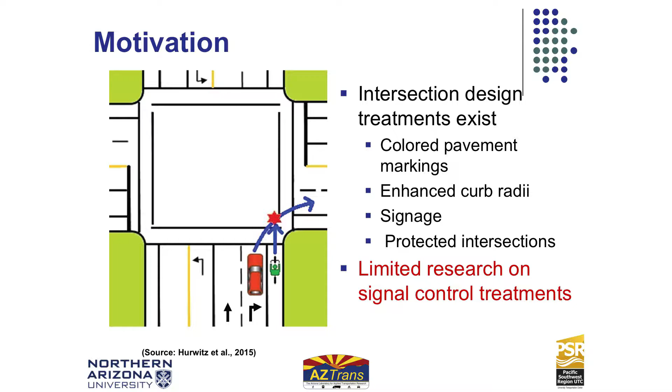I was born and raised at Purdue in research, and we did research on vehicle performance measures. And in the last 5 or 6 years, I've gotten more involved in multimodal performance. So I think I have a little different perspective on this than someone who might be purely involved in the multimodal side of this.

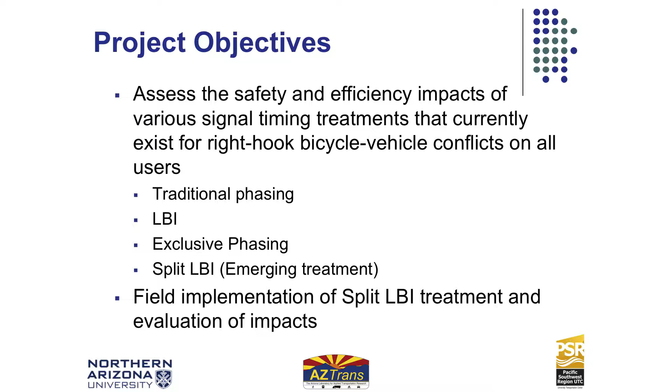I'm going to go back up one slide. So when we did this project, this started in about 2015. There had been some recent work looking at paint markings, other things that can reduce conflicts at signalized intersections. We wanted to look at the signal side of it: traditional phasing, a leading bike interval, exclusive phasing, and a split leading bike interval. I'll explain what these LBI mean shortly if you're not familiar with that. And then we also want to do a field implementation.

So the motivation is to avoid this conflict, this right hook conflict, where we have the vehicle turning right and the bicycle proceeding through. This can happen when a vehicle overtakes a cyclist as this is occurring, or it can also happen where the cyclist overtakes the vehicle if the vehicle is queuing to wait for people to cross, or other friction. So there's been limited research on the signal control options to address this.

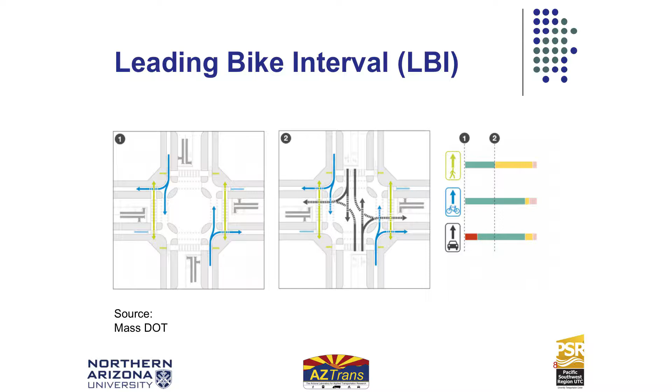If we look at that from a bicycle standpoint, these figures are from a Massachusetts DOT guide. We're looking at the phase indication for pedestrians, bicycles, and motor vehicles. On the left here, what we're doing is holding the vehicles and giving the bicycles preference, giving them time to start their cross at the intersection. Think about what we're trying to avoid: the vehicle turning across the bicycle. If we can get those bicycles queued up at the start of green through, we've avoided the possibility of those conflicts.

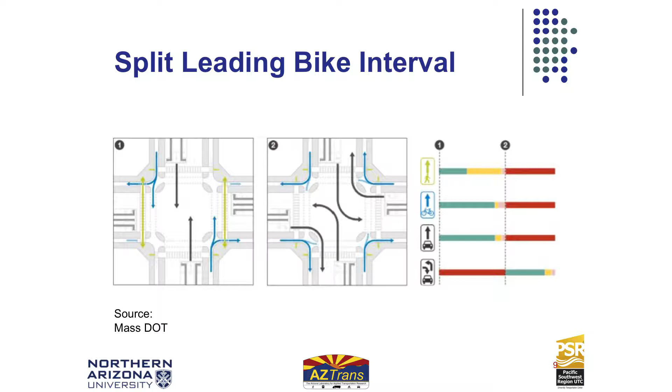A split leading bike interval is very similar to an LBI, except in this case we are only holding the right-turning traffic, allowing the through vehicles to go along with the bicycles and pedestrians. The idea is that with a full LBI I increase the delay for all vehicles, but with this I only increase the delay for the right-turning vehicles. The through vehicles don't see much of a change in how long they have to wait.

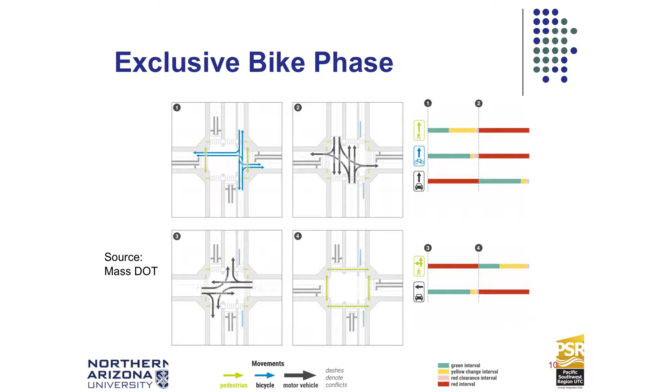The last treatment that was part of this isn't really a signal strategy, but came about because we had access to the video and the funds to analyze it: that of a mixing zone. The idea with a mixing zone is that we move this conflict point back from the stop line of the intersection, or out of the intersection, and allow the different users a chance to sort themselves out before they get to the intersection.

Survey was the first part of this. We had a total of 69 respondents. Again, this was a practitioner survey. We had 65% identify themselves as engineers, 18% as planners, researchers, and a few others. We asked about their awareness of split LBI. Now, this survey was done in about 2016, so I think this has likely shifted, I hope, by now.

About half knew of it. As far as those that actually implemented the different strategies, we had about 25 or 30 that did protected bike phases, LPIs (leading pedestrian interval), and leading bike interval, we only had 10 that did that. These don't need to add up to the total number, they can do multiple ones. Split LBI, just a couple of them, and about a third of the respondents didn't do any of that.

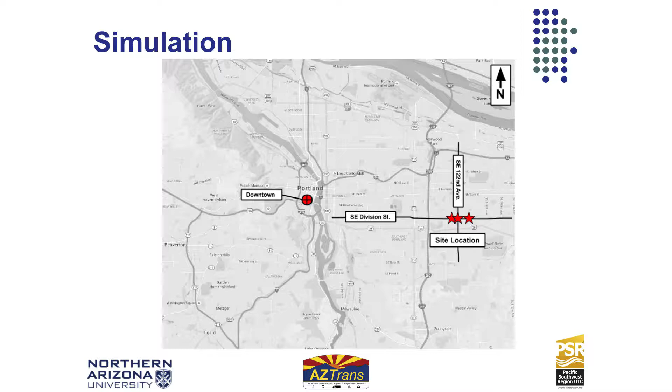The next step was to do a simulation. The idea was to see what the impact was on the delay of all users for the various strategies. Just prior to this project, we did a very similar project on pedestrian strategies at signalized intersections, and it was actually very useful. This didn't work out very well for the simulation for a couple of reasons. One being that the way bicycles queue up at an intersection, when we did this we used VISSIM, didn't really match reality. I mean, if you have 8 bicycles going up to a bike box, they're not going to stack 8 behind each other.

They're going to kind of queue up into a group and go forward like that. At the time we did this, and I'm unable to say if VISSIM has changed that because I haven't done work in that space since, that was one of our issues.

So we did a software-in-the-loop simulation with an ASC/3 traffic controller. Who knows what this term is? All right, we got two. This one? All right, excellent.

So ASC/3 is a traffic controller. It's used to determine how long each direction is going to get green, yellow, and red for all the users at a signalized intersection. Software in the loop simply means that I have my simulation software, which is VISSIM. I actually have a plugin inside that runs the software of that ASC/3 controller. So as opposed to using an embedded traffic controller inside the simulation, which likely will not have the same features as a field traffic controller, I can do everything in that software, in that simulation, on that ASC/3 that I can do out in the field. There are a couple of different controllers that have that available.

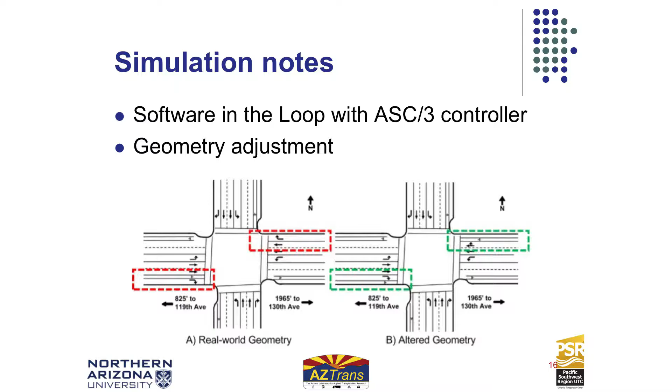So on the left side, this is our real-world geometry. We see that the bike lane is between the right turn lane and the through lane. That's where we want that. We don't want the right turning vehicles to have to cross the bicycles. And in the westbound direction, we don't have a bike lane here.

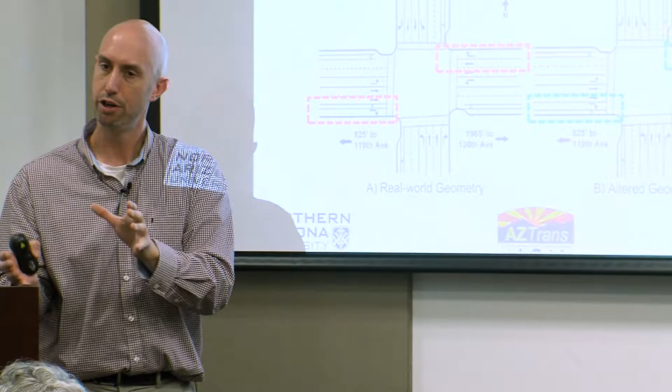So what we did in the simulation, we changed the bike lane to put it outside of the right turn lane, which is something we wouldn't do, but we wanted to have that conflict occur in simulation. And again, when you think about the simulation results, we're not trying to validate this to the real world. We're just looking for differences between strategies within the same simulation space.

And then westbound, we changed this into a combined through-right with the bike lane to the right of it to see that conflict.

We collected field data. There's a firm called Quality Counts that we paid to do this. Our pedestrian volumes were not coded for directions, just a kind of a note. Our bike volumes were extremely low.

Portland is somewhat of a cyclist mecca when you're closer to downtown. This is far enough east that there weren't the number of bicycles in the real world data to give you any reasonable interaction between the different modes. So what we did was we ran the bikes in 10 different sets of the simulation as a percentage of the mode share.

So what we would do is for each one of these different data sets, we would have more and more bicycles to help us get a little larger set of interactions. Again, this is a comparative simulation. We're not looking to validate this to any real world deployment.

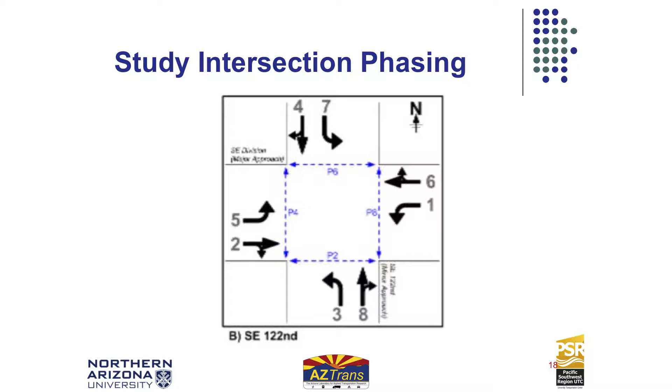So this is a diagram of the intersection phasing at the intersection. The only thing you need to think about, if you don't understand what this ring numbering is, is that phase 6 is the westbound movement and phase 2 is the eastbound movement. This diagram will be up in the upper right-hand corner as I talk about some of the results, so you can kind of think about the direction we're looking at.

All right, so first we look at the leading bike interval. This leading bike interval is compared against a base case. The base case is just a coordinated timing plan with vehicles being coordinated in the east and westbound direction along Division Avenue.

So we look at the through movement, LBI delay, for the vehicles, and we see that we do increase delay about 5 seconds or so, which makes sense because our LBI was a 5-second delay. For the right turn delay, we see an increase in delay, actually, excuse me, not much of this. Apologies, I think I have a timing on this I didn't think I had. Going back, we saw an increase in the right turn for the vehicle delay as well.

The split LBI, again, now we're looking at phase 2. We're looking at this direction here.

Vehicle delay. This is the case where we're just holding the right turning vehicles. The through vehicles are allowed to go.

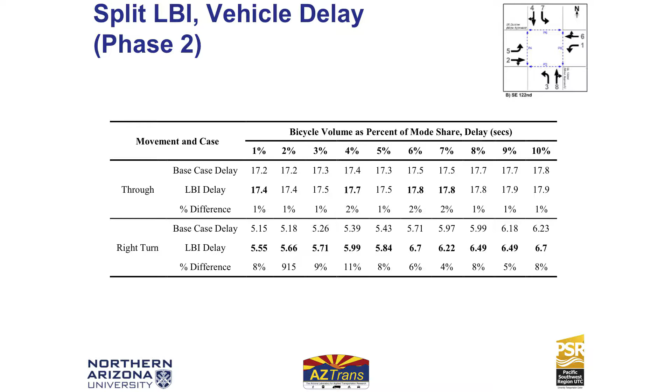With the bicycles, we see that the through vehicle delay doesn't really change, but we have an increase in right turn delay. Again, it's what we would expect to see. The bike volumes don't change very much.

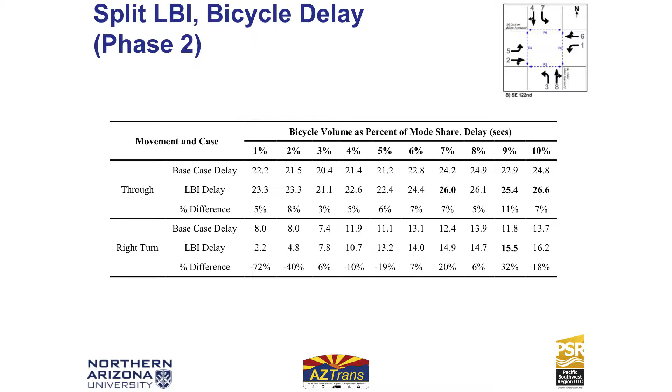As far as bicycle delay, we see a decrease in the bicycle delay at lower percentages, but at higher percentages, this is a coordinated arterial, so that means we're setting green times artificially to move vehicles up and down that corridor. When we have very low numbers of bicycles, when they arrive at the intersection really changes the amount of delay they have. When you only have a handful of bikes, you get numbers that look like this. So these are things you should think about when you run a simulation, to think about what the results actually mean, because this doesn't mean a whole lot, as I presented to a camera.

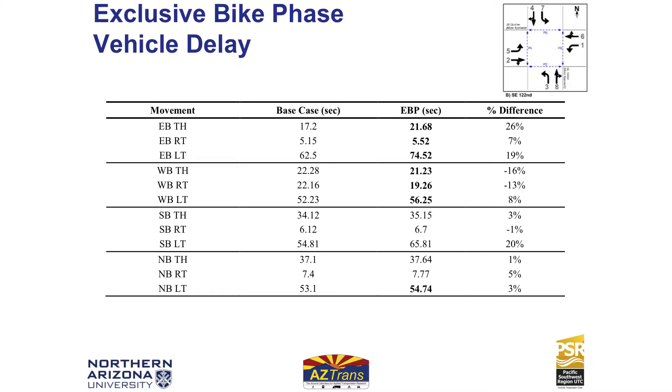Looking at the exclusive bike phase for vehicle delay, this is when we hold all the movements at the intersection and let the bicycles go. This is vehicle delay, we see base case versus exclusive bike phase. We see an increase in delay in most of the cases. There are a couple that are lower, but again, we're looking at when those bicycles arrive during that cycle. Then we see something similar for the bicycle delay.

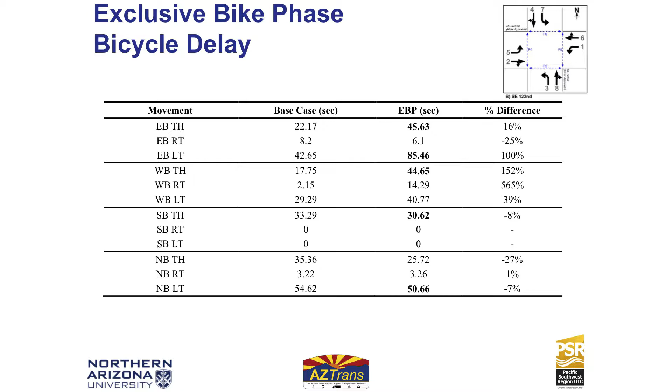All right, I'm going to get to what I think is the real meat of this presentation.

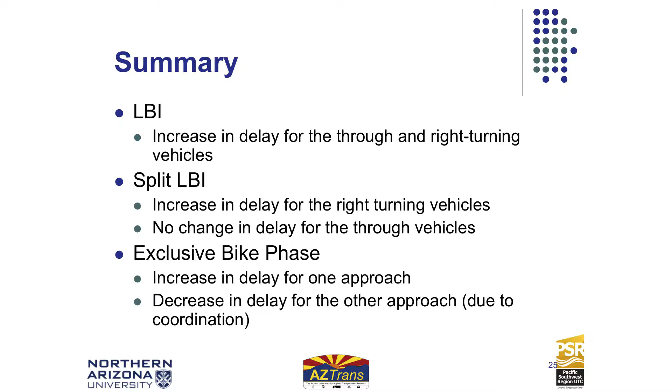All right, the field evaluation. Our initial intent was to do a nice, clean before and after study. We have a specific intersection approach, collect data about the amount of conflicts between vehicles and bicycles, make one or two changes to it, then collect data again, and try to develop some numerical guidance from that.

It didn't happen. We tried the city of Phoenix, which I'll show you in a bit. We did do that, but over two weeks, we didn't have any bicycle motor vehicle conflicts. The other locations, city of Portland and New York City, while they made changes, there were a lot of changes at the same time. Anyone who's tried to run a statistical comparison knows that when you only have two sites and you change seven things, there's no way you can pull out any one of those individual metrics or changes and point to it with any degree of certainty.

So we analyzed a number of different sites and provide some qualitative comments on this, with the idea of moving forward, trying to provide some numerical guidance for when to use a certain countermeasure to reduce bicycle motor vehicle conflicts.

So the metrics we looked at: whether or not there was an incident, which we classified as the bicycle and the motor vehicle crossing paths temporally within 5 seconds of each other, and I have a figure I'll show shortly. Post-encroachment time, I'll explain that shortly as well. Time since bicycle green, how long from when the bike green came on did the interaction happen, the speed, and whether or not there was an evasive action.

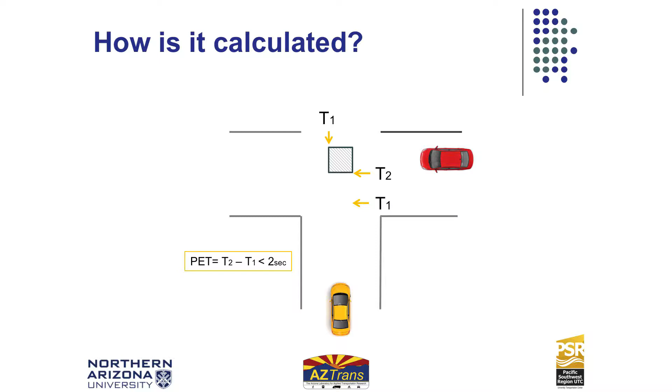Post-encroachment time is the time from when this vehicle leaves the space to this vehicle arriving at the space. So you can imagine if this is a very small value, that's a very serious encounter. You were very close to actually the two users making contact. If it's a larger value, not quite as dangerous.

One of the previous literatures we looked at classified the duration of the PET value from no interaction to very dangerous interaction. One thing to think about is, do you think this is the same for Flagstaff, Arizona versus Metro LA versus Portland versus New York City? It's definitely not. So that's something else to think about as you look at the results of this work.

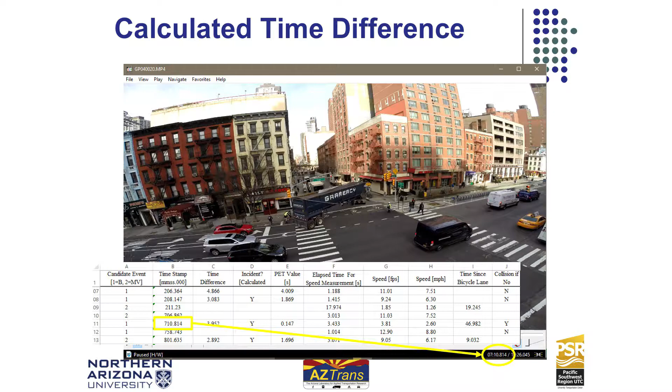So this is really turning left, and you'll see there's a cyclist behind here as we forward through the video. Here's the cyclist right here, here's the truck. So what we're doing is looking at the timestamp on the video from when each of those leaves this spot right here. Going back one frame, the truck left at 7:06, the cyclist left at 7:10. That gives us a time difference of 4 seconds.

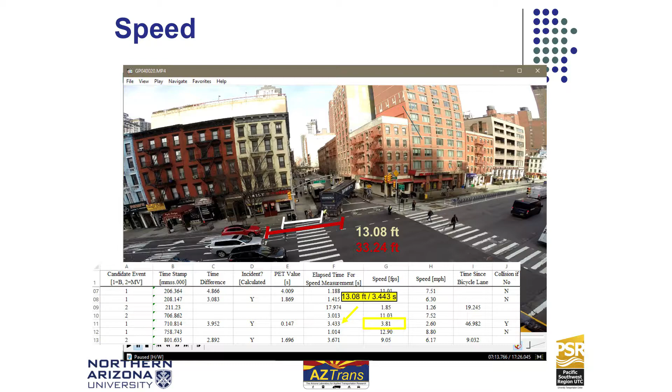And then when we actually look at the PET value between these two, it's 0.15 seconds. That's a very close, very dangerous interaction. We also looked at the speed of both the bicycles and the vehicle. The intent was to look at severity of that, but we didn't use this much in the analysis—we didn't get to that point.

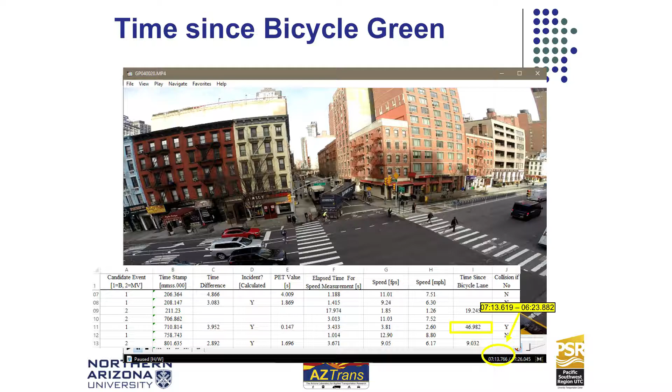So we used different landmarks on the screen to do that. We also looked at when this interaction happened measured to when the bicycle green started. Because if you think about releasing vehicles and bicycles with those conflicts, you can try to bunch your bicycles up at a certain point in the cycle to avoid those conflicts. It's similar to when you have a large volume of pedestrians—cars see them better than just one pedestrian, or cars see a group of bikes better than just one bicycle. So there's less chance of a conflict happening.

Moving on to our data overview: we ended up analyzing 7 different sets of data. We had 2 places where we had data before and after. One was 12th and Campbell in Phoenix, where we went from concurrent—serving the bicycles with the green ball—to a leading bike interval. And in New York City, we went from concurrent with LPI, which I'll show you shortly with the site, to a split LBI.

So on the surface, this seems like a really good idea—we can do a comparison—but they also changed where the bike lane was, changed coordination of the bikes up and down the street. There were just a number of things that happened.

So looking at a summary of the data analysis, the guidance I can provide from this work is really qualitative, because there are so many differences between the sites that trying to develop any kind of numerical guidance is not very fruitful.

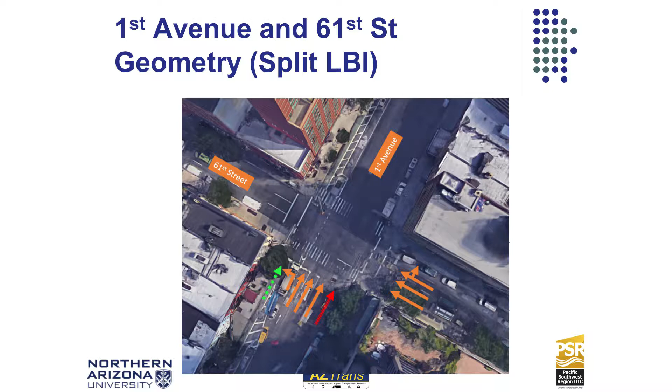So the split LBI, right? We're looking at 1st Avenue and 61st Street in New York City. Here's my bicycle lane, here's my left turn lane for vehicles.

If I actually look at the incidents for this, we didn't have good videos of this site. If we break down the percentage of incidents, we had a total of 445 incidents. About 40% of bicycles were involved in an incident with a motor vehicle. About 60% of those would be considered very dangerous.

Right, so we also looked at when the incident happened in relation to when the bicycle green started. This had a leading interval of 8 seconds, so the bikes had 8 seconds to go before the vehicles. So we really shouldn't see much going on here.

But then we also see a pretty healthy peak about 10 seconds after the vehicles are allowed to go. So this tells me that I could look at the coordination of cyclists down that corridor and possibly do something to move this up so that they're reaching the intersection during that protected part of it.

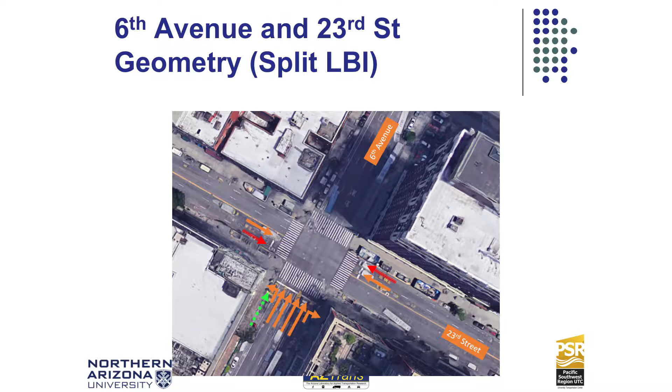Next intersection, this is the split LBI. So here we're going to hold the right turning traffic while we allow the through vehicles to go and the cyclists to go. This was the after case for our one place where we had before and after. Here is a picture of it, and we'll show ideally how things should operate.

Okay, we have our cyclist and our taxi cab. Seemed to work fairly well. The cyclist was really trucking, but the car paid attention, so it worked out well.

Here's a situation where we have a box truck, and we have cyclists moving around the box truck. One thing that we know is part of the equation is what's going on in this crosswalk right here.

What's that pedestrian volume? And we did not account for that in this work. We have another project that we think will be funded shortly, fingers crossed, that will look at doing that. But we know that's part of the equation.

So this is a summary of interactions at that intersection with the split LBI. We had only about 17% of bicycles involved in an incident versus 38% at the other locations. This one feels a bit safer. I hesitate to ever say it is a bit safer because you never really know, but based upon this study, that feels like this is a little better place to cycle through.

We got a little bit of peaking here with the conflicts, but that's pretty late into the green. But again, you do see possibly an opportunity to shift those cyclists earlier to avoid that conflict.

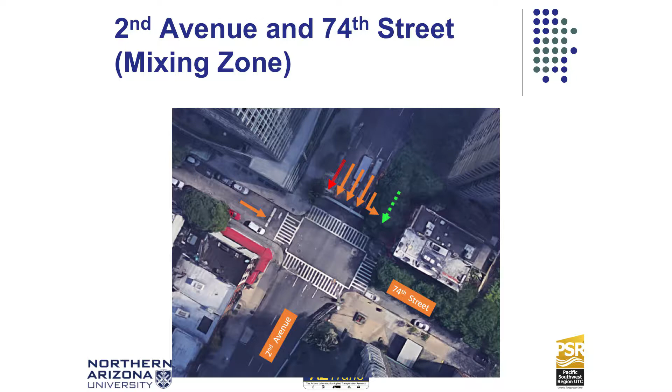Mixing zone. One location in New York where we had a mixing zone, we're looking at this direction, and this video was the original video I showed to highlight what that conflict looked like.

Again, here's that same location, we're just looking at the start of the cycle here. So here are the bicyclists coming through. The vehicles should be paying attention to what's going on to avoid that conflict. The point, or the desire of this treatment, is that you're moving this conflict point a little bit upstream so these users can figure out who should have the right of way before the actual point where the vehicle is trying to make the turn.

Here's an example of a near miss. This was actually the original video that we showed with a little bit of interaction.

About 18% at this location. We've had a couple of sites that all hovered around 20% or so. Severity, about 40% or so, very dangerous versus dangerous. And again, this is New York City - there's a lot of people there, right? So they may not consider this to be as bad a situation as we might, based upon whatever our requirements for personal space might be.

No leading interval here. This is our plot of when these happened versus the start of a green, so we're kind of all over the place in this location. Notes from this mixing zone: there was a lot of merging into the mixing zone at the last second. We had an issue with the pedestrian standing in the bicycle lane. This bike lane was against the curb, so that was an issue as far as causing some friction for the cyclists.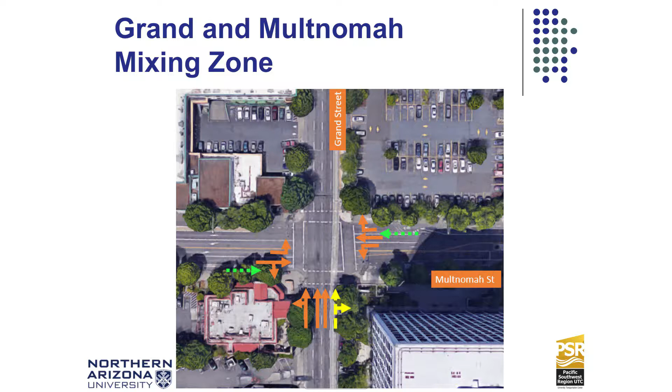This site, another mixing zone site, this is in Portland, Oregon. So different location, different population.

The video is a little bit dark, but here's a bus, and there's a cyclist coming through - we'll see if we can see it. Apologies, this came up much brighter on my screen, but you see the bus is waiting for the cyclist, and the cyclist will pull through. Then there's another example of the same site, where the cyclist just weaves his or her way into that stream of traffic.

Has anyone ever ridden a bike around Portland, Oregon? It's really an interesting place because there's such different cultures. When you're in the downtown area, the bus is always going to wait - the people are going to wait. But when you're out east towards Gresham in the suburbs, it's like driving around rural Arizona or rural California, where the bicycle goes - yeah, it's okay you're there, but I don't really want you there. Whereas downtown, it's very polite, everyone waits for the cyclist. It's really a different experience.

So this site, we had about 20% of the cyclists were involved in an interaction with the motor vehicle.

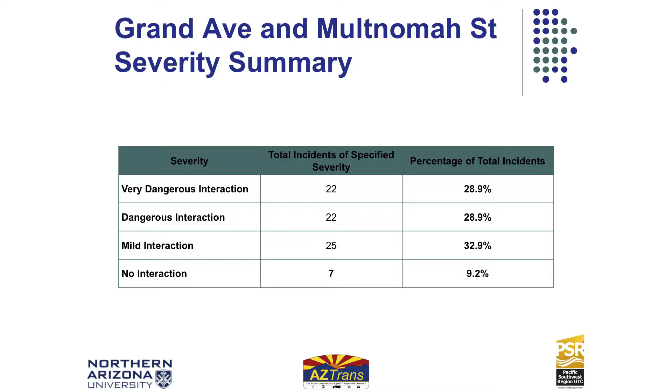About a third or so were between very dangerous and mild interaction. This is pretty flat when these happened based upon when the green started.

Notes to take away from this: again, we see the vehicles merging at the last second. The bikes tried to merge into the middle of the mixing zone as soon as possible, just because they're more visible—our interpretation is cars can see you better out there. And then the bus stop caused some additional friction here.

Overall findings: little confusion observed in the mixing zone about who's supposed to go when. Previous research by a Portland State researcher found that only about 60% of bicycles correctly used the mixing zone. Our percent of conflicts were comparable between the mixing zone and our other locations.

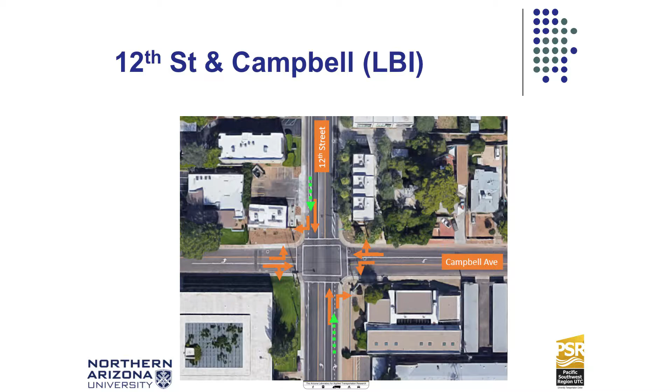Okay, here's City of Phoenix. 11 minutes, right on time. We're looking at this southbound approach here, right turning vehicles and the bike lane.

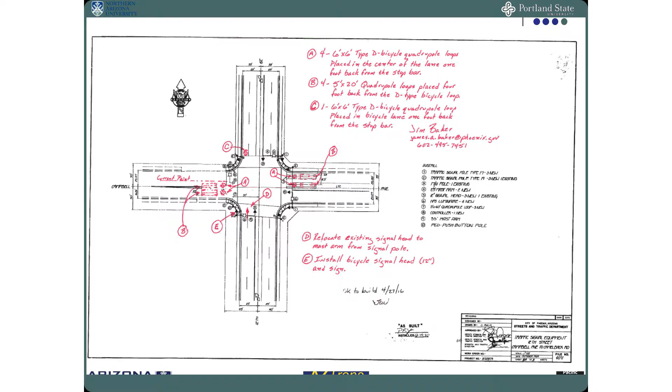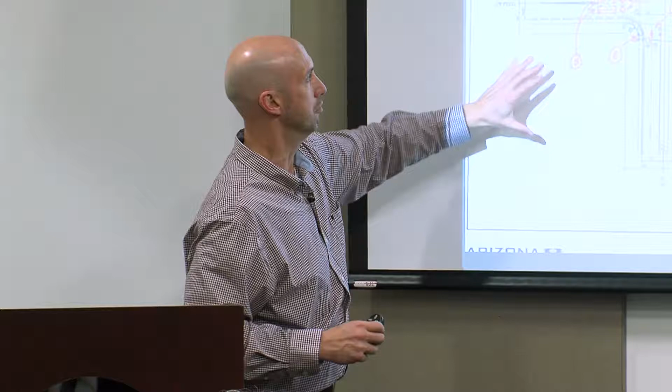I put this in here to show all the work that the City of Phoenix did to make this a go. This is their first bicycle signal within the city, and I think we all kind of knew going in after we chose the site that we weren't going to see a whole lot of action. But this gave them the ability to say, yes, we've already done this, and it's performed fairly well to allow them to deploy further bike signals. The City of Phoenix has been working very hard in the last 5, 6, or 7 years or so to improve operations for non-motorized users, but they're up against quite a challenge.

Who's driven around Phoenix? If you've driven in Vegas, it's very similar—mile spacing, 45-mile-an-hour speed limits. So the people that do ride bicycles are typically what we call vehicular cyclists, in that they're okay with riding with the traffic stream and dealing with those interactions. But if we really want to increase mode share, we have to improve the comfort of the ride. And that's where bike boulevards, which is one of theirs, comes into play.

So they changed out the cabinet, they changed out the controller, they put in some detection, all this to make this work. And this is our site. Here's our bike signal, we've got 2 signal heads, we've got some signage. Our camera was mounted to a luminaire arm just up street.

Excellent view. Week before, week after: 86 bikes in 5 days, no incidents or conflicts. After, 74 bikes over 7 days, no incidents or conflicts.

If you go this way about half a mile or so, the road turns back to the north because there's a canal that runs here. So there's just not that many vehicles turning right, so we weren't surprised that that was what we found out.

There was one video that one of the City of Phoenix folks sent us. And what you're looking at, this is a cyclist perspective. Here's our bike signal here, or that's our ped signal, here's our bike signal up here.

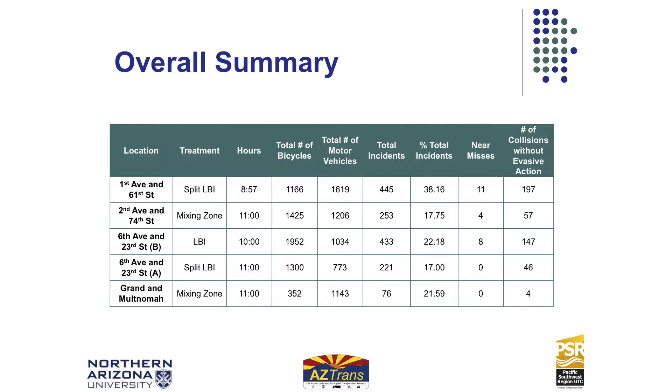So here's a summary of all the data. I won't dwell too much on this because I already talked about these individually. Again, we had one location with that split LBI where we had a lot of incidents; everything else was around 20%. Again, I stress how challenging it is to make any numerical comparison between these different sites because there are so many different factors at each one.

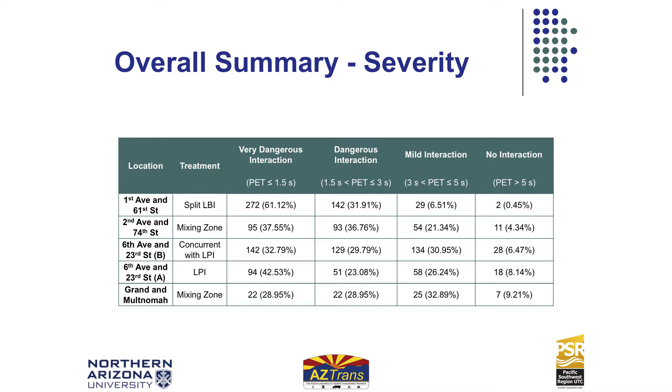Again, looking at severity, we can look at the comparison across the sites too, but the same caveat does apply as far as so many different things going on. So our goal at the start of this project was to provide guidance to practitioners as far as which strategy to employ, with the hope of having some numbers to back it up, but it ended up being very qualitative.

So if we look at bicycle volumes and vehicle turning volumes: if both of them are low, we can serve the bicycles and motor vehicles concurrently. If we're a little bit higher, perhaps a mixing zone is where to go. Higher further, we look at split LBI or an LBI. Again, as we get to more and more conflicting movements, we're trying to split those movements in time.

And then the exclusive bike phase would be the point where we get to a large volume of conflicts. This can be either that the bike volumes are choking off the vehicles, or the vehicles are choking off the bikes. It can be either way.

If we rank these by vehicular efficiency, the concurrent phase is going to be the most efficient for vehicles, with the least amount of additional delay to deal with the bicycles. The exclusive bike phase is going to be the least efficient, again, because we're making everybody wait while we serve the bicycles.

If we rank these by turning volumes, if we have high turning volumes, the exclusive bike phase is where we're going to want to be, to separate those in time. If we have low turning volumes, we're looking at concurrent service.

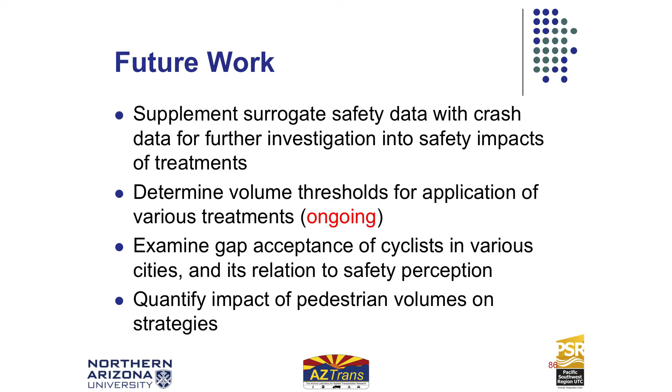Future work - we want to supplement the surrogate data with actual crash data, looking historically at the sites. This requires a time horizon, both then and now, to actually do a reasonable analysis. We also want to determine volume thresholds for application of various treatments - that was the plot with all the lines on it, which is actually ongoing.

Examine the gap acceptance of cyclists in various cities and relate it to the perception of safety - so is 1.5 seconds a serious PET value here versus New York City versus Flagstaff versus somewhere else? And then quantify the impact of pedestrian volumes on the strategies. If we have a very high pedestrian movement that everyone's trying to cross, it's going to increase the number of conflicts for that location.